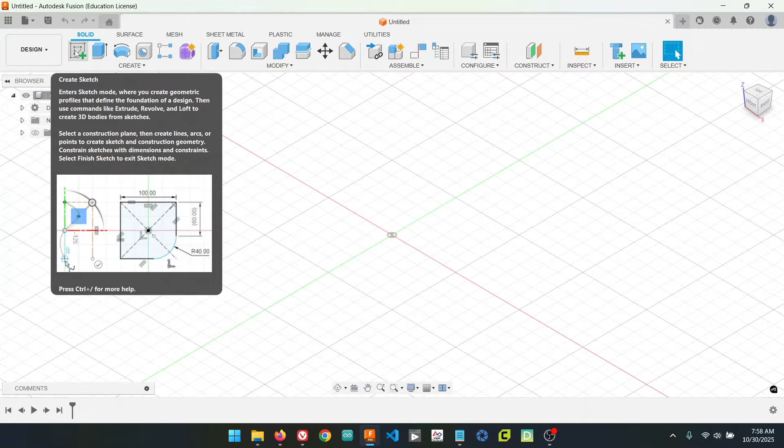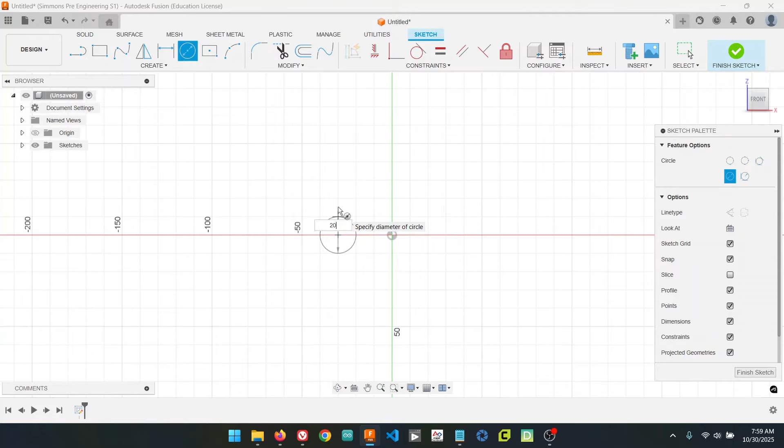Pick any one of these planes, it really doesn't matter at this point. We're going to go find circle. So you can type C, or you can find it up here in the create part of the toolbar. And I'm just going to kind of arbitrarily click right here on this origin line and go up. I'm going to type 20 to make a diameter of 20. And then I'm going to make another circle, again, arbitrarily over here. I'm going to type 20 again and click.

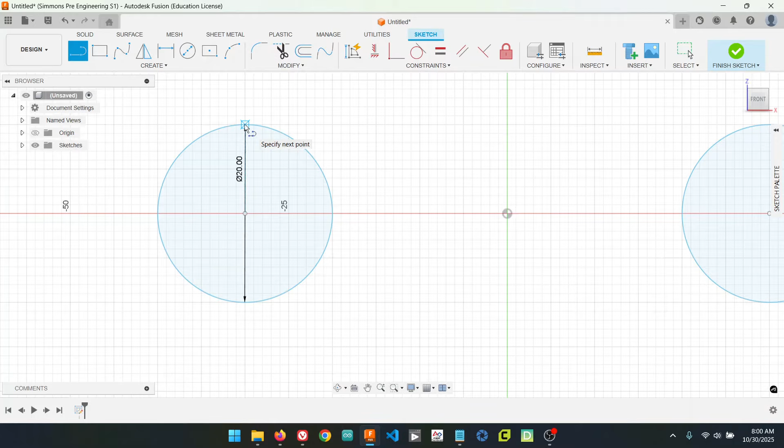Now I'm going to go to line, and I want to make a line that is exactly lined up with the center of the circle. So I'm gonna look carefully there to make sure that I get that just right. Notice the box that forms around the X. That tells me that this is lined up with the center. So now I'm gonna click, I'm gonna drag across,

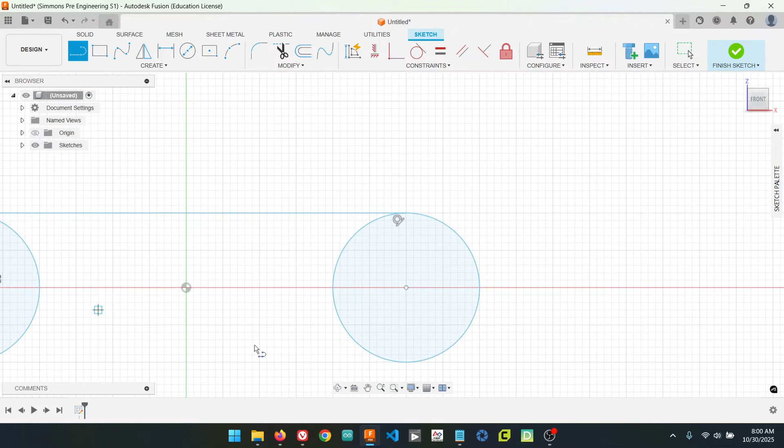and again I'm gonna make sure that I'm lined up with this line here, looking at that box with the circle on it. And this symbol here tells me that we are tangent with that circle. So we are connected and it's joined correctly. If it's not joined correctly, it won't work in the next step here.

All right, so now I'm still in line. I'm going to go back in line with this circle or the center of the circle, find that X in the box, click, drag across, and finally one last time, I get the tangent symbol. That's perfect. All right, so now I'm going to finish my sketch. So top right corner,

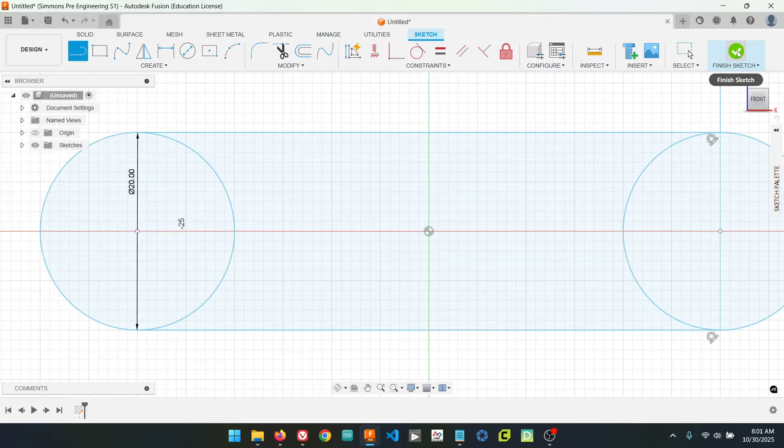and now I'm going to extrude my sketch. So I'm going to click, click, click, and I'm going to extrude it by 1 millimeter, which is not a lot. And I'm just going to say, okay. Okay, great.

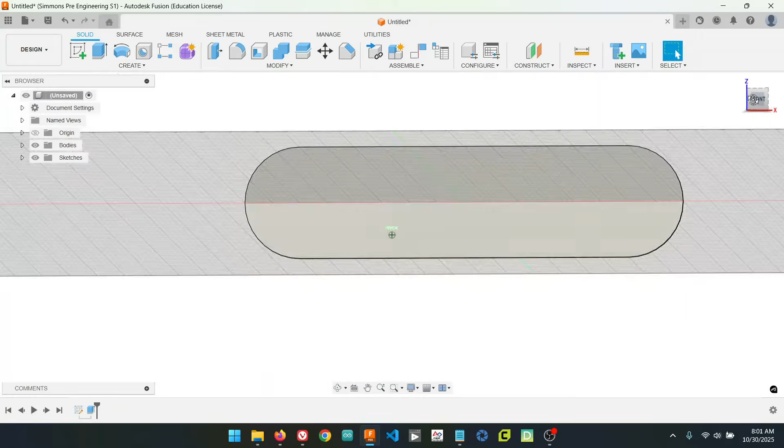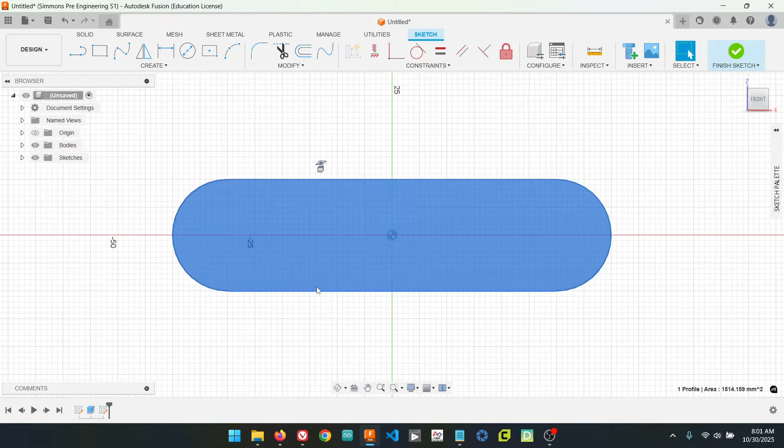Now I'm going to make another sketch. So I'm going to go back to sketch, and I'm going to click on my name tag here, and I'm going to put my name on here. So we never dimensioned these lines because we don't know what size they are. I should have done this in the last step actually, but that's okay. So let's figure out how much space our name's going to take. So I'm going to go to create, and I'm going to find where it says text.

Click on that. I'm going to just click OK here, and I'm going to kind of arbitrarily just click right here and just drag out a rectangle. So I'm still clicking, and now I'm going to click again, and it says sample text. This is where I'm going to put my name.

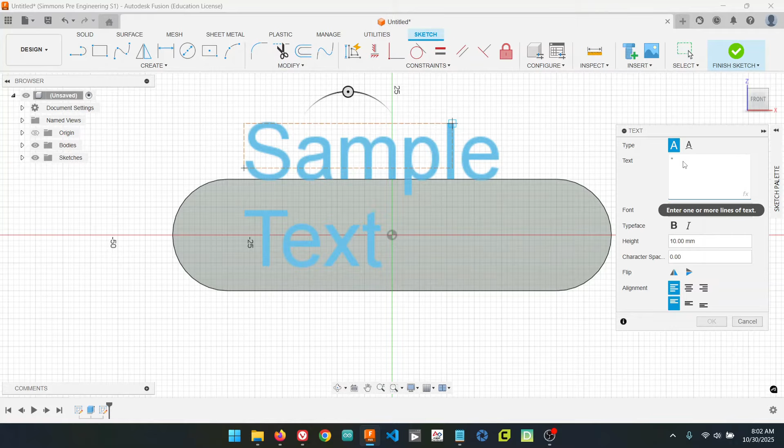Now over here on the right hand side, it's probably hard for you to see, especially with this being video, but there's two little quotes. If I don't do anything and I just type, it'll work just fine. If you accidentally delete those quotes right here, you'll have to type them again. It won't work otherwise. So I'm going to just type, and you can type your initials or your last name, whatever you want really, as long as it's not super long, it's fine. And I'm going to say, okay.

All right, so now I'm going to take this box. I'm going to use this as my measurement to see how big my name is. You can see the name tag that I made is actually just about the right size. Anyway, you can also turn it here, so you got to be careful about that. But I want to drag it down until the box is the size of my name. That's what we're looking for. We're just trying to get a rough idea of how big your name is, so we make the name tag the right size.

So I'm going to go to Sketch Dimensions, and I'm going to click on the left side. So I waited till this was a blue dotted line, and it automatically knew I wanted to measure that. That's fine. I don't even have to click here because I'm not trying to actually dimension this. I just want to know what this size is. So my name is 57 millimeters in length. Okay. So now I'm just going to escape out of here.

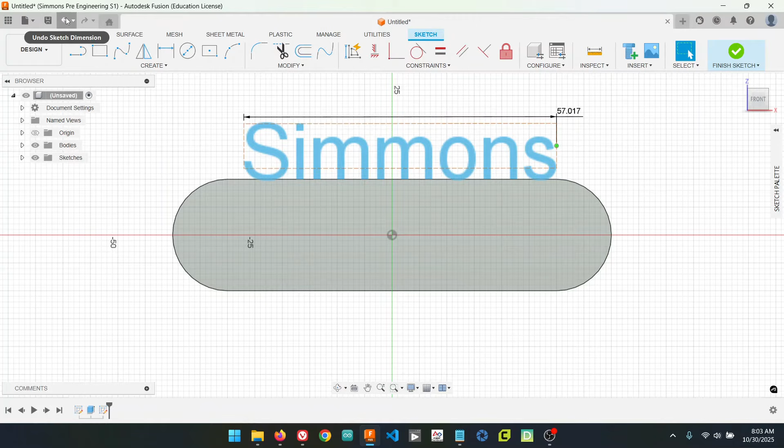In fact, I'm gonna hit the undo sketch right here. I could have went to the other drawing and done this. So I went back until I'm not in that sketch anymore. And down here on the history, you can see that that sketch is gone. So this is a sketch, this is an extrusion. In the sketch here, I'll redo it real quick so you can see. There's the old sketch. So if I just go back one more time, it's gone.

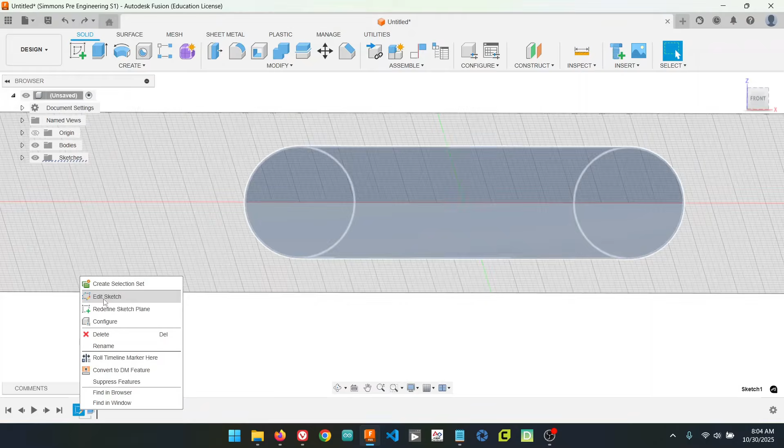So I'm going to click on this old sketch, the first one, and on a Chromebook, you're going to two-finger click. With a mouse, you're going to right-click, and I'm going to choose Edit Sketch. So the length of your name or initials is probably different than mine, and that's just fine. You're going to make this the length of your name.

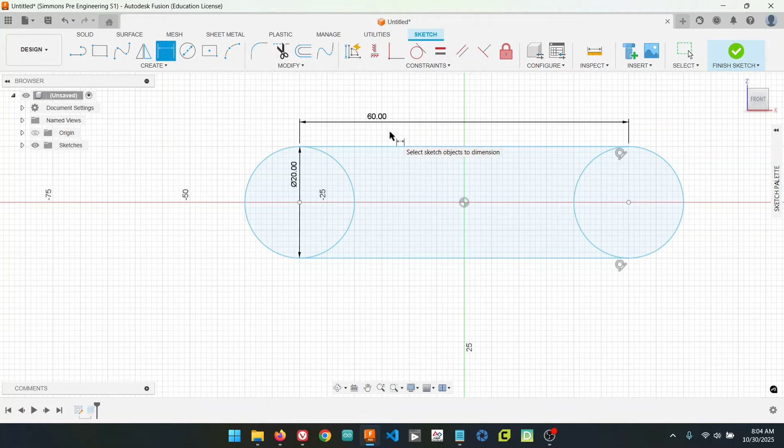So I'm going to go to Dimension, I'm going to click here, and mine happens to be 60, which is really close to 57. I'm going to keep mine at 60 because that's just about perfect. But if yours was bigger or smaller, you can just define it to be whatever size it needs to be. So whatever your name length was, if it was 27, make it 30. If it was 33, make it 35 or something like that. It can be a little bigger or a little smaller. It'll fit. It doesn't have to be perfect.

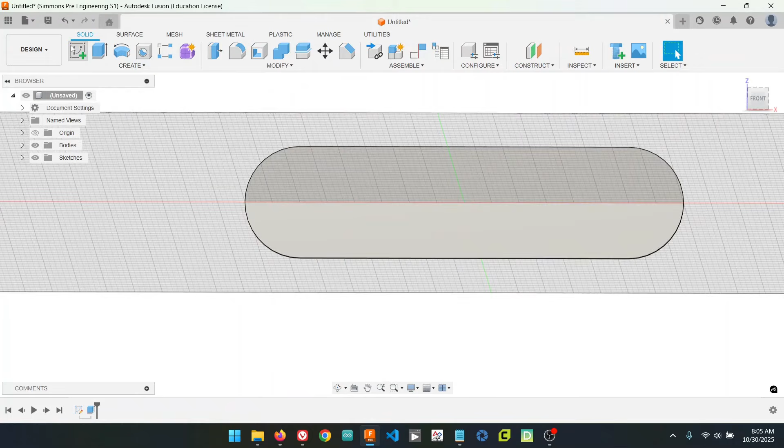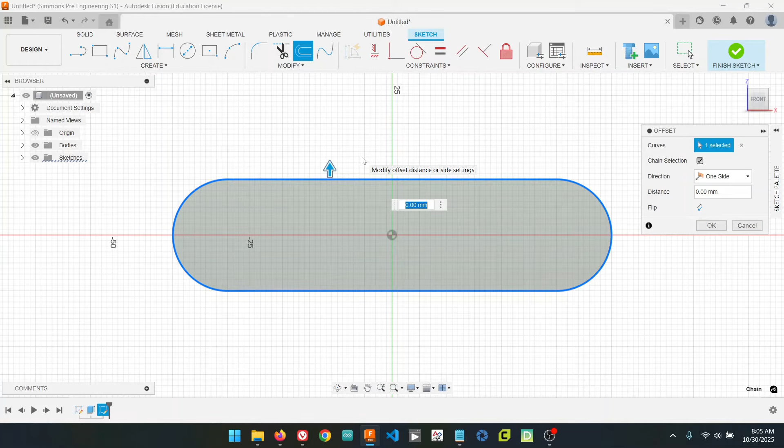Okay, so let's go back and we'll make another sketch here now that we have this the right size. Sorry, I didn't say it really, but I went to finish sketch. Before we put our name on there, let's make a border on this. So I'm going to go up here to offset, and I'm going to click that. I'm going to click the outside of our drawing, and I want to go in 1 millimeter. So I'm going to type -1 and press enter. Now we have a border that's 1 millimeter in.

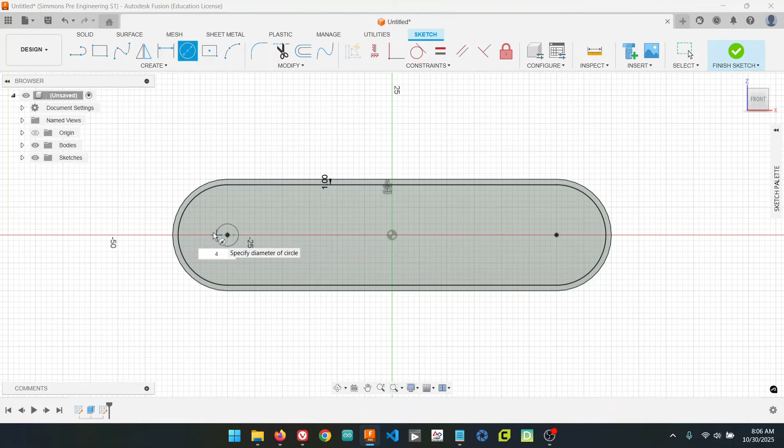I also want to put a circle right here. So you see this black dot? This is the center of this circle here. I'm going to click on the center of that circle and move out, and I'm going to make a ring that's 4 millimeters in diameter. And I could either draw another circle around this that's 6 millimeters in diameter, or I could use the offset command again. Either one is just fine. So I use offset, and I'm going to go 1 millimeter again, press enter. And so now I have a ring around that that's 1 millimeter further out.

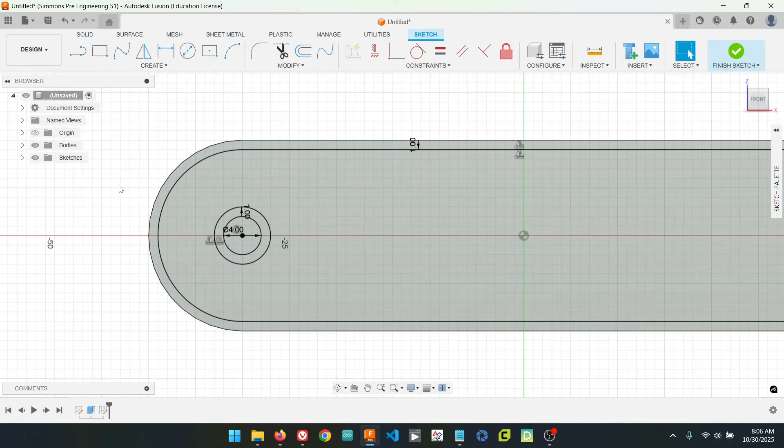Okay. Now we could put our name in here right now, but I'm going to make that a separate extrusion just in case we have any issue. It's easier to kind of divide this stuff up and do it in multiple steps. So I'm going to go to finish sketch, and I'm going to lean this like that so you can see the extrusion happening a little better.

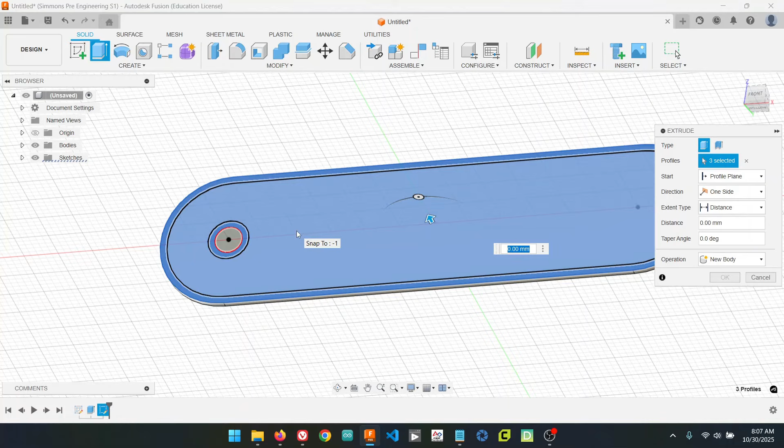And I'm going to go up here to extrude, and I'm going to click on the outside ring. Notice it changes color, it gets a little lighter, like that. Blue, that's what we're looking for. Perfect. And I'm going to click on this ring here too. That's what it should look like. If you accidentally click something like this, it's fine. Just click it again and it'll go away. So I want to make this 1 millimeter extrusion. So I'm going to press 1 and press enter. And there you can see it now has a raised edge.

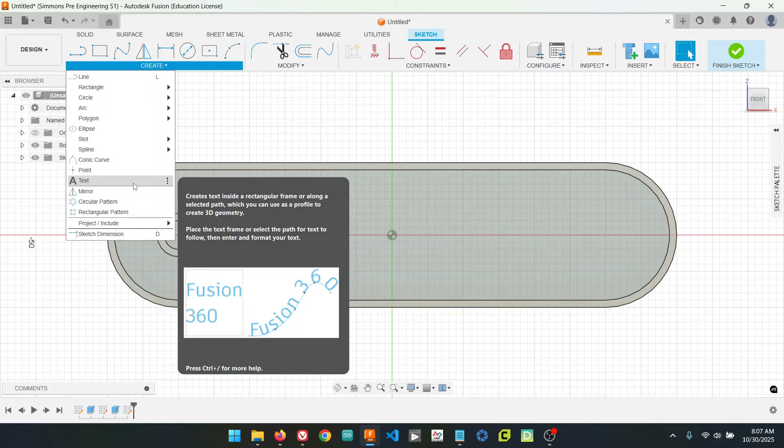Perfect. Okay, so now I'm going to click on this interior spot here again. I'm going to go to create sketch. And we're going to put our name on there this time. So I'm going to go to create text. And I'm going to click kind of arbitrarily down like this and drag across. It doesn't really matter. And again, without erasing these quotes, I'm going to put my name. I didn't say it last time, but you could change the font. I want you to keep the height the same, but you can change the font. And there's really no need to change these because we're going to move this around. So I'm going to say okay.

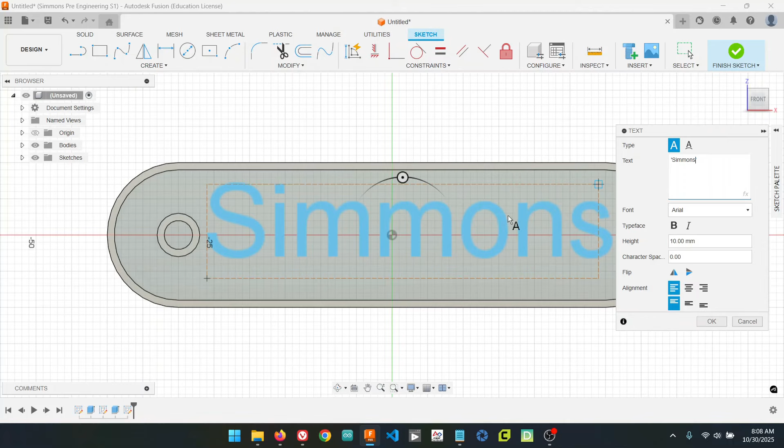And now at this stage, we can actually drag this around and move it however we like. So maybe not the most accurate way to do it by just kind of eyeballing it, but I can see that that's pretty close to centered up and down. Oops. It's pretty close to centered vertically, and left to right. That looks pretty decent. All right, I think that looks pretty good. All right, so I like that.

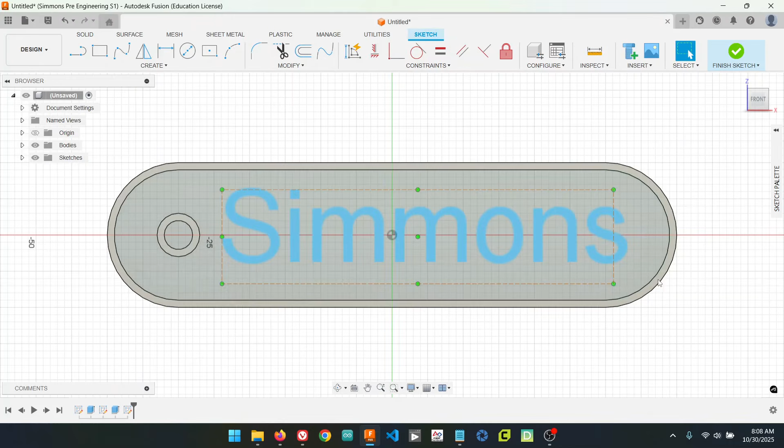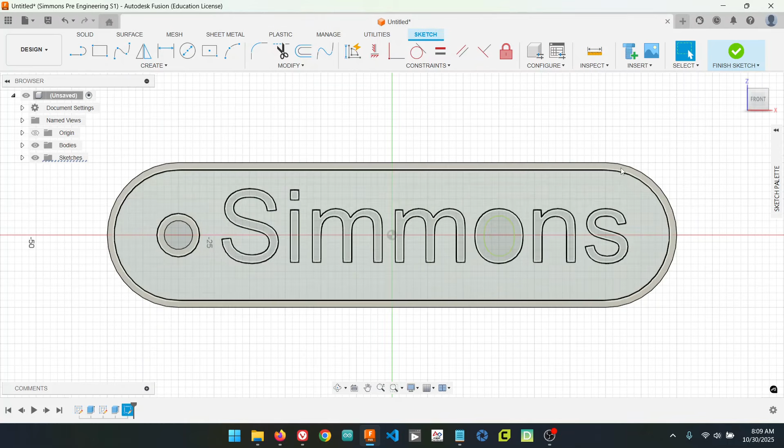Now I'm going to explode this text because this text is just words on the screen right now. We're going to turn it into a drawing. So I'm going to point at the text and I'm going to right click and choose explode text. And now all the outline of the writing is now like a drawing. So I'm going to press finish sketch, and we're going to extrude that again.

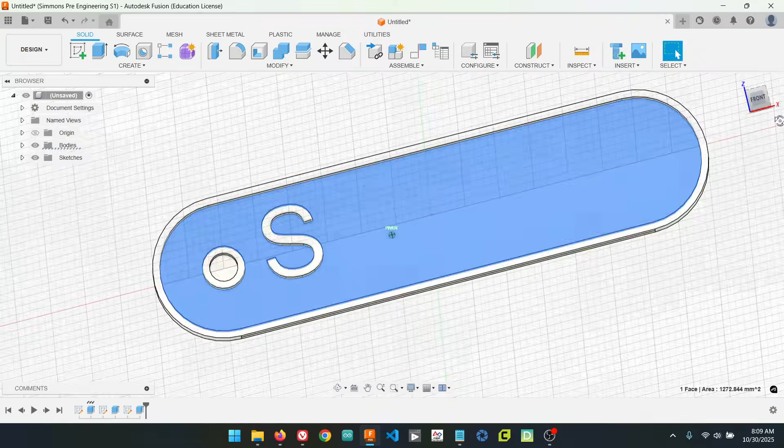And one mistake that people make when they extrude things is they'll stop partway through. So if I just extrude this 1 millimeter, don't do this by the way, I lose all the other part of that drawing. It's gone. I don't have any way to get back to it directly. So the only way I can really do that is by doing Control Z and undoing what I just did, or by going here and editing this extrusion. So I'm going to try that. We're going to edit this feature, and now I can recheck all these other parts that I missed.

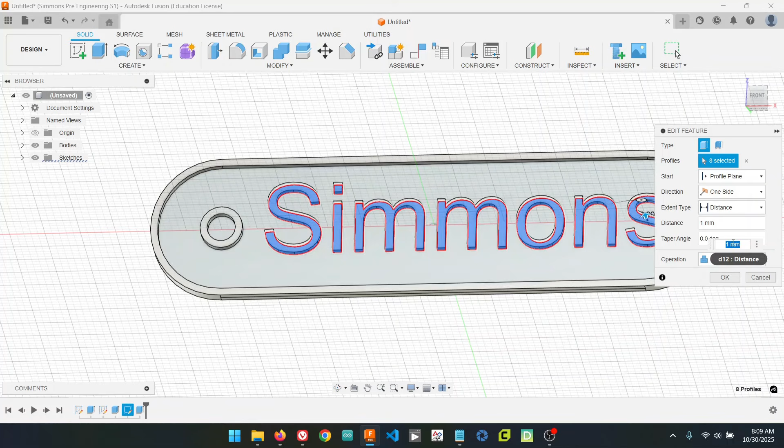And again, just like before, if you accidentally click the wrong place, just unclick it. So click through your whole name. Once that looks right, we're going to extrude that 1 millimeter and say OK. Double check your spelling and everything else is good.

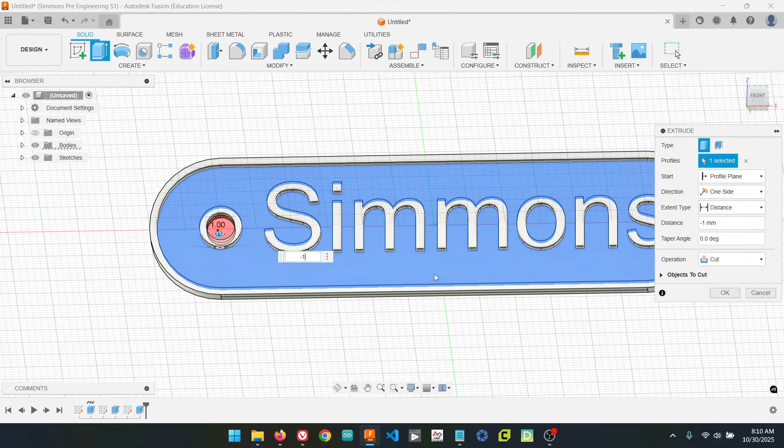The last thing we have to do is punch this hole through because this hole doesn't go through. It's solid there. So I'm going to go back to extrude, click here if you didn't already, and we're going to extrude this by -1, and that will make a hole. It automatically decides that you want to make a cut there, so we should be good. And now we have our keychain.

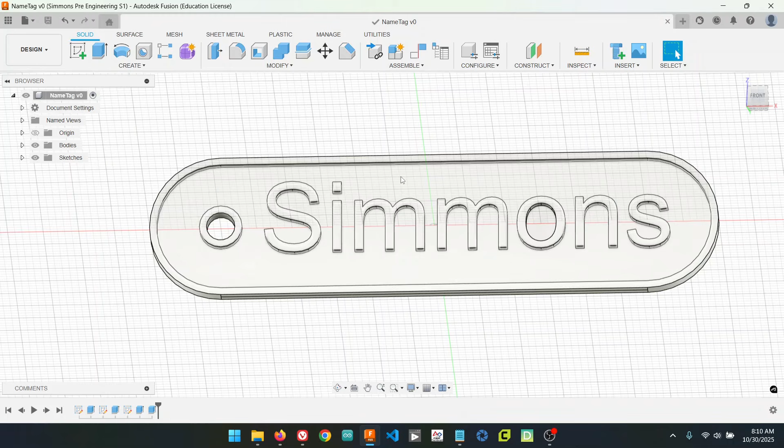So the very last step is going to be to save it. This won't automatically save, so we're going to go to the File button up here in the top corner, choose Save. You can also do Control S, and we'll give it a name like keychain or something like that. Name tag. And there you are. You made your first item in Autodesk Fusion.